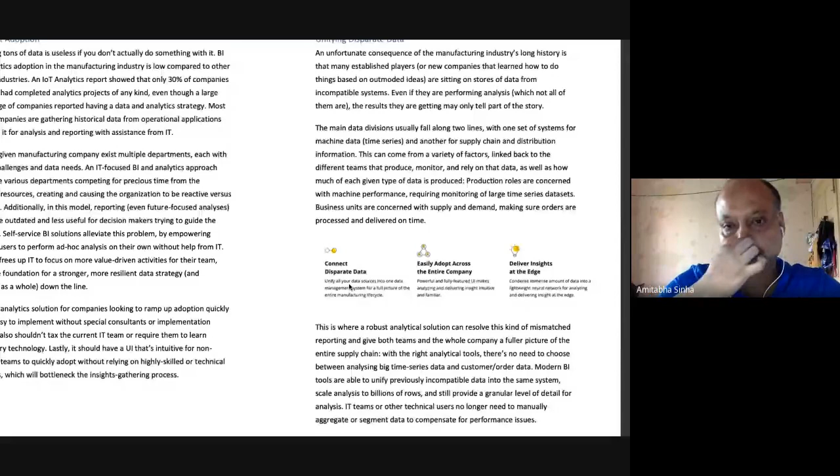They're typically called distributed control systems, DCS in short form. And then there are process technologies, like I was explaining, Lummus, where there are gas crackers and hydrocrackers. They are governed by something known as historians. There is a process historian, there is a data historian. All these historians also generate a hell of a lot of data. Now, as of yesteryears, let me stand corrected.

So this data were all generated, and they used to be consumed by the, quote unquote, instrumentation team, which is typically the control engineers, using control systems. And they used to use that data to operate the plant, but that is where the data was restricted. Beyond that, the data had no visibility.

For example, the head of the plant would not get an overarching view of the plant. If I take an example of Haldia Petrochemicals itself, Haldia Petrochemicals has 9 individual sub plants, and that corresponds to one full plant of operations of HPL. But the head of the plant would not have one single visibility of the entire plant. He or she would have individual visibility with respect to the cracker unit, the storage units, the downstream, but they're all disparate. There was no one uniformity.

Now, what was the problem? The problem was that these individual sub plants are very dependent on each other. Let's say from the storage, the raw material should flow into your cracker unit. From the cracker unit, there are downstream products which get created. Those downstream products would again go into your downstream units. So each one of them is dependent on the other.

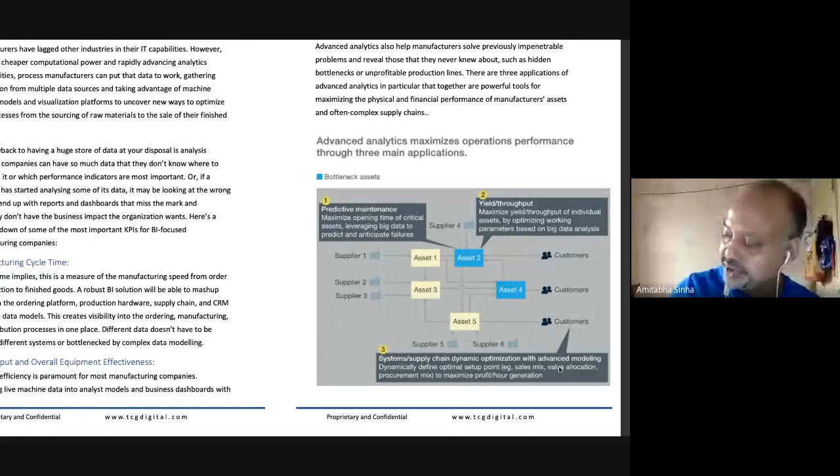Based on the 3 months demand, can we plan the production? This is the demand for the next 3 months across various geographies of India. So, let's say this is October, I'm planning for November, December and January. So in order for the supply to reach, let's say 15th of November at Mumbai, on the West Coast...

The truck needs to leave the plant, say, 7 days prior - for argument's sake, leave on 7th of November. So in order for the truck or number of trucks to leave on 7th of November, I need to have that quality - we call it monomers and polymers, I'll explain that shortly - that needs to be produced by the 6th, that particular volume, so the loading can happen and the trucks can be dispatched on the 7th. So if the production needs to be finalized by the 6th, the production needs to start from the 4th.

Which means the cracking should start on the 4th and the downstream product should be ready by the 6th - it takes about 2 days. So if it starts from the 4th of November, I need the naphtha to be in place by the 3rd of November.

Now, many times the naphtha is not locally procured from India. So in order to meet that demand, if I need that particular quality - 84% Piona quality of naphtha - by the 3rd of November, where will it come from? It will come from, say, Japan. If it comes from Japan, it needs to start coming in - it should be ordered by, say, 15th of October, and then dispatched on the 17th. Give me a second.

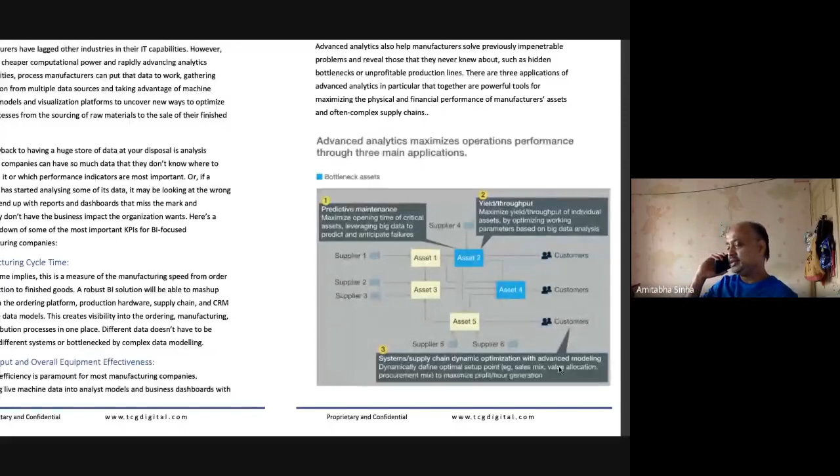Okay, so you understand the complexity of the planning, right? This is typically with one byproduct, with one region, let's say west. Similarly, south will have the need for a different grade. Now for a different grade, how will that manufacturing work? So where do we, how should we plan that production?

How should we plan that procurement? Where should we give the order? So it's fairly complex. But you realize that if you're able to solve these three problems, we are looking at a fairly advanced analytics, machine learning driven plant with a lot of benefits, right?

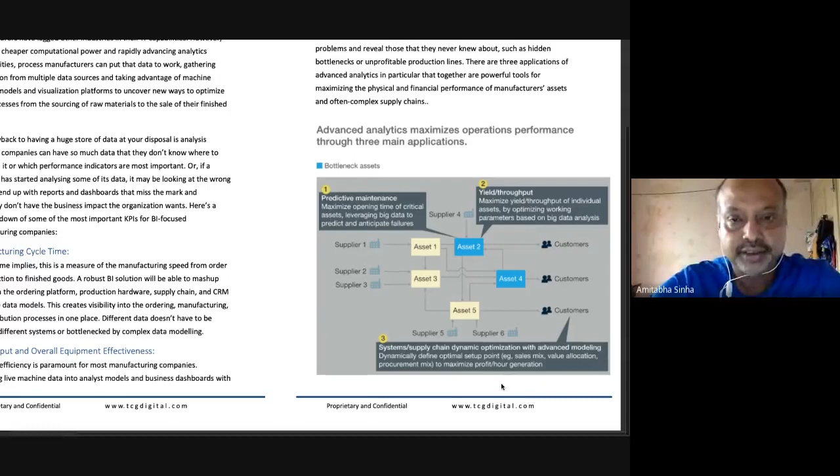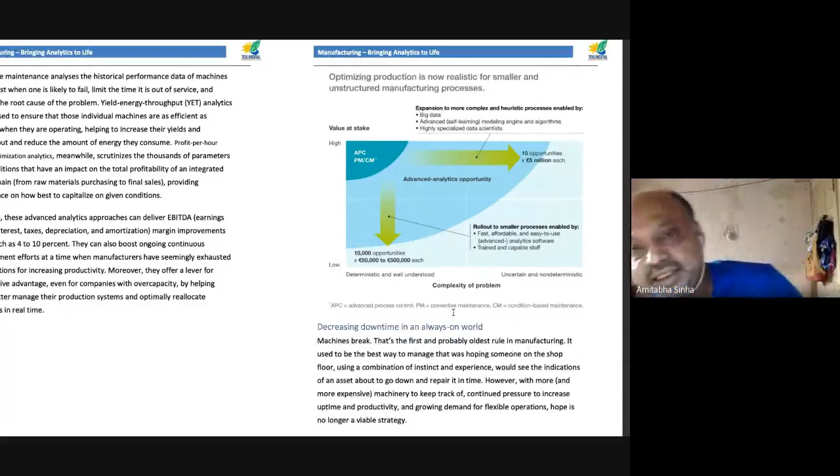So what we have seen is there is something called value at stake. What do we mean by value at stake? Value at stake is, as the complexity of the problem goes up, the value at stake also goes up, right? Which means if you're able to solve the predictive maintenance, yield optimization, as well as your supply chain, obviously your value at stake will be higher, and actually the complexity of the problem will also be high.

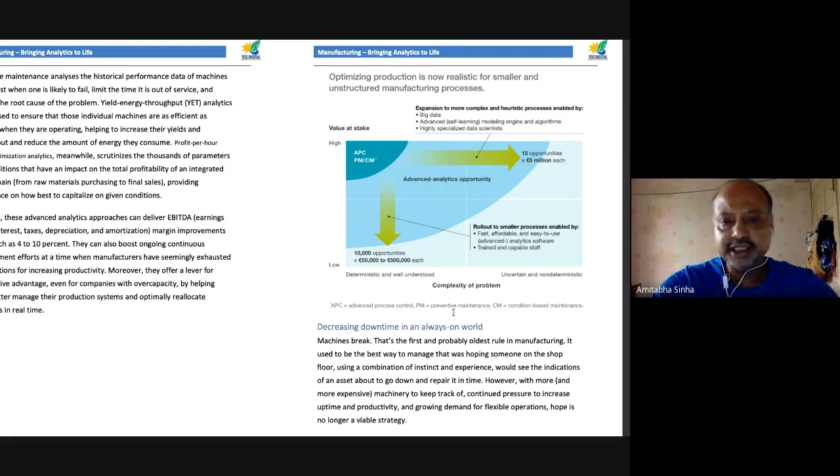The question is, shall we take all the opportunities together? May not be possible, right? So it has to be taken, for example, one step at a time. So typically, what are the different baby steps?

So inventory optimization, where you optimize the inventory. Now please keep this in mind - in case of a manufacturing unit, unlike a retail, if you're talking about a kirana shop, or you're talking about a hypermarket or a superstore, something like you'd be familiar with Spencer's, Reliance Fresh, more retails of the world - there, the inventory is one side. One side in the sense, what is your stock? Your stock of the individual SKUs, stock keeping units, either at your godown or at your shop. But in case of manufacturing, the inventory is of two types.

The incoming inventory, or we call it inward inventory, which is typically the raw materials. And then there is the outgoing or outward inventory, which is the end products. So both of them need to be optimized, because any plant would have storages which are fairly fixed in nature. So the incoming naphtha can only have so many gallons, like million gallons or million tons, that kind of a concept. Let's say X million ton of naphtha can only be in the inward inventory. Similarly, the outward inventory can only have, let's say, A amount of grade 1, B amount of grade 2 capacity, and you can't mix them.

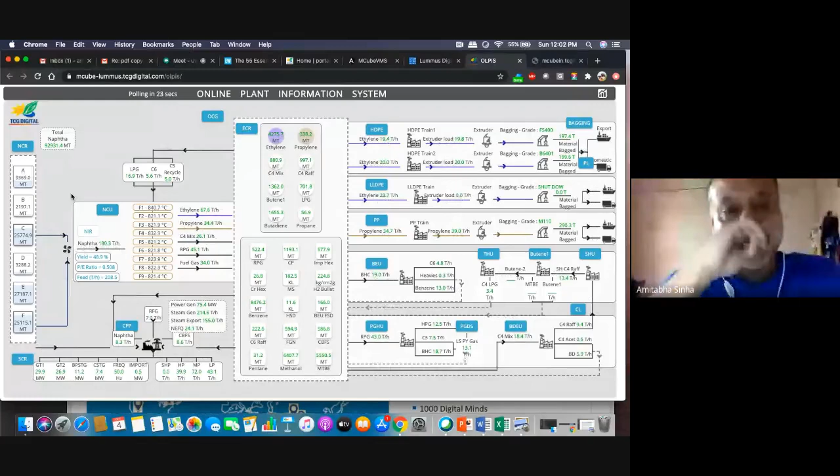For example, let me explain this. This is the cracker unit. The cracker unit takes in naphtha. So in order to produce an end product, the cracker unit expects, let's say, about 83% paraffin content. Now, so what we are suggesting is that between tank C and tank F, if you blend using, let's say, a 40-60 ratio, where tank C has a higher quality and tank F has a lower quality, you will get the desired result. So which means it is an optimal blending that goes in.

So this is your NCR control room, which controls the tank, and then it goes to the heart of the plant, which is NCU, naphtha cracker unit. Now this is, you see the naphtha is going in at 180.3 tons per hour, and these are F1 to F9, your furnaces, each with a different temperature. So this is the naphtha feed going in, and what you see is called the product slate output. So this is ethylene, propylene, C4 mix, RPG, and fuel gas. This is the output from the naphtha cracker unit, and they get stored into different intermediate storages, right?

So this is your, see for example in this case, ethylene, propylene, C4 mix, right? You have RPG here, so on and so forth. So these are your intermediate storages, okay. Now each of them is controlled by a plant. The blue ones are your smaller plants. I was talking about HPL having about 9 plants, sub plants. So these are your sub plants, right? NCR, SCR, NCU, OCG, CPP, etc. So ECR is the East Control Room, which takes care of the intermediate storages.

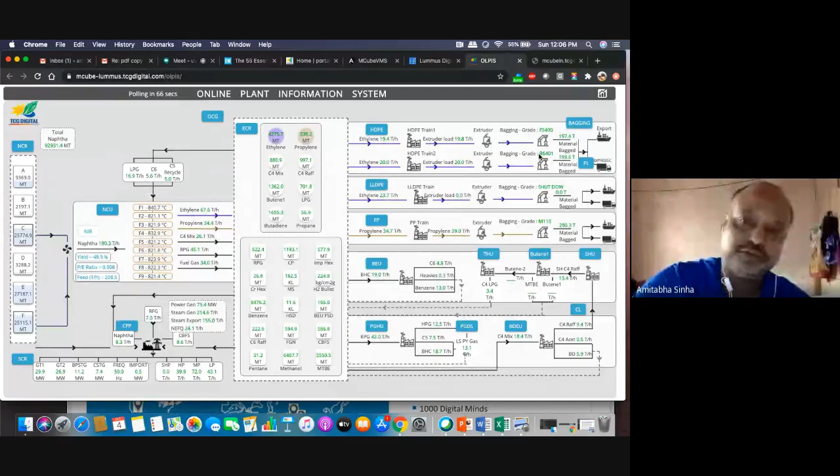Reddy's laboratory, and so this is getting produced. Similarly, 6401, this is your food grade plastic, which is typically used for food products. So this is, I'm not sure if you are familiar.

This order is going to Oriental Cuisine. Oriental Cuisine is the company who has your chain restaurants like Mainland China or Calcutta's of the world. Okay, so this is getting produced for them. So that's an HDPE. Similarly, LLDPE. So this is high density polyethylene. This is called linear low density polyethylene.

So see, for example, this plant is under shutdown. That is why you see that the extruder is not working. So this is actually in shutdown, not working now, going under maintenance. This is PP, which is polypropylene. This is producing a particular grade called M110, and it is getting produced.

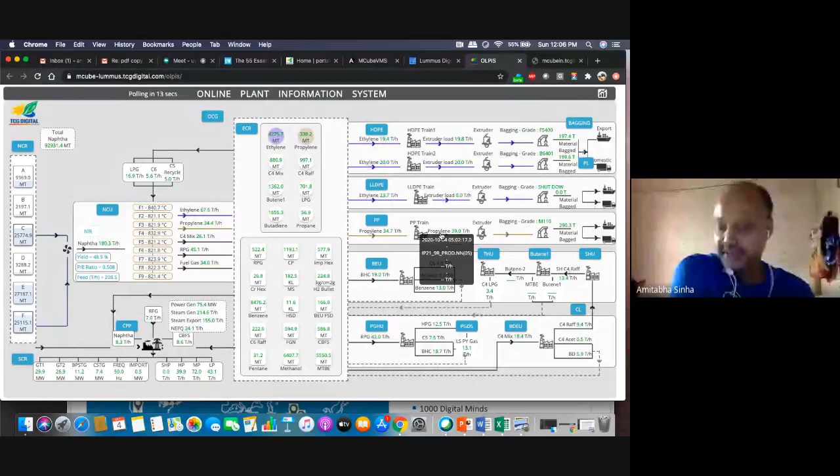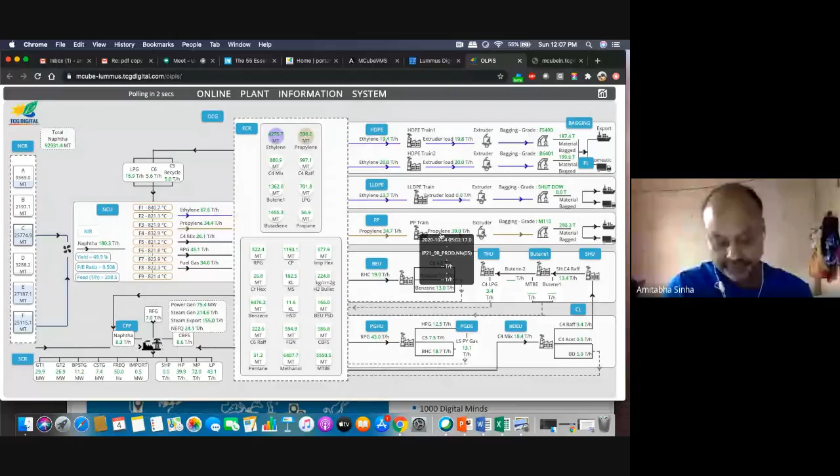So this polypropylene is typically sent to companies like Nilkamal Plastics, who actually manufacture furnitures and all that stuff. Okay, so that's your polypropylene. So the point is, what you see here is the entire battery limit of the plant. At any point in time, you know what is happening in the plant real time.

Now this particular 2D digital twin is available on a big screen near the WTD's and the CFO's respective rooms at the Haldia head office, and they know what is happening real time. Now, this is called level 0, or the first level view. If you go to the second level view, you get to see different KPIs. This is the operations KPI, this is the production KPI, this is the quality KPI.

If you look at, for example, operations KPI, this is your naphtha flow, coil output pressure, coil output temperature. So you get to see the different COT temperatures currently there. And you want to see a trend. I think the data is getting refreshed, so this is in between that. But you will be able to see the trends. The trends are all there. You can see that in production as well.

So at any point in time, you get to see what are the main KPIs, what is the naphtha, what is the LPG flow, so on and so forth. All these data points are available. The entire plant data is not restricted only to plant operations, but also available from the head office. And this is true for all. For example, if you go to NCR, you will be able to see the trend as well. The data is getting refreshed, which is fine.

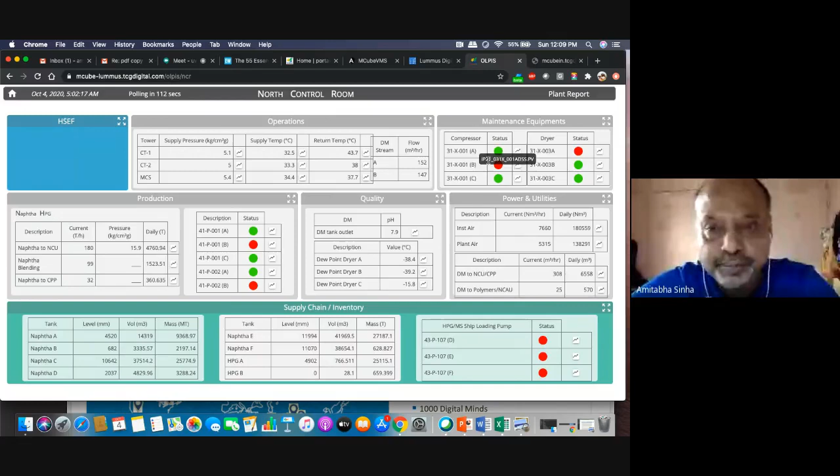You can see the trend of all the compressors, the compressor maintenance equipment, the production parameters: which pump is currently active, which pump is not, the daily totalizer value, the trends, etc. So all this trending is possible. Unfortunately, the data is getting refreshed because on Sunday we do some maintenance. But at any point in time, you get all the KPIs and real-time values. Now this is a huge benefit.

Having the visibility itself. So that was the first thing: working with the disparate data, getting all the data at one place, so that at any point in time you can actually go and work. Again, this is like a typical KPI report. This is NCR's plant report, so you get to see what density is there, the quality itself. And this is your captive power plant, water cut, highlights, so everything is there.

So this is the ingest layer. The ingest layer is capable of taking in data from transaction systems, different IT/OT tags, social media, flat files, etc. So what you saw in that system that I showed is the data is getting refreshed every 120 seconds. So if I go here, for example, you will see the polling in 109 seconds. So this will get refreshed. So this is real-time data that is coming in from the plant. So this is the capability of IT/OT streaming data.

So that's the ingestion layer. Once we get the data, in order to work on machine learning and advanced analytics, it is absolutely important that you, for example, detect the noise and remove it, understand the outliers and remove it, and also transform the data, because from your DCS we are pulling in about 15,000 tags every 2 minutes. And there are tags coming in from, you saw, 9 plants, in all pumps, compressors, furnaces, and so forth.

So sometimes, because of error in the flow meter or the different meters, the data reading can be wrong, correct? So that's possible. It can happen that, for example, some sensor has actually gone offline, so it will not give any data as well. So it's very important that you actually process the data and transform the data.

Now once we process and transform the data, we store the data; we have different data stores to store it. This is typically what we call a lakehouse. Why do we call it a lakehouse? See, this is neither a data lake nor a data warehouse. If you're talking banking parlance, it would be a data warehouse, right? And in some cases, it would be a data lake, a lot of data. But we call it a lakehouse because it's the best of data lake as well as data warehouse.

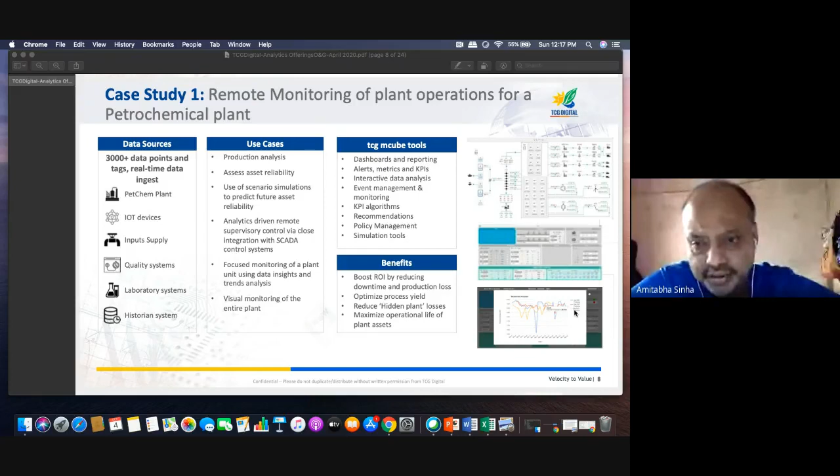What are the use cases? The use cases are many. This is the tool, the diagram that I was showing. Unfortunately, I could not show you the trend. This is how the trending looks at the bottom. These are the benefits. These are the various data sources. This is very important: the ability to take in data from data historians, distributed control systems, and so on. And this is the remote view which I was showing you.

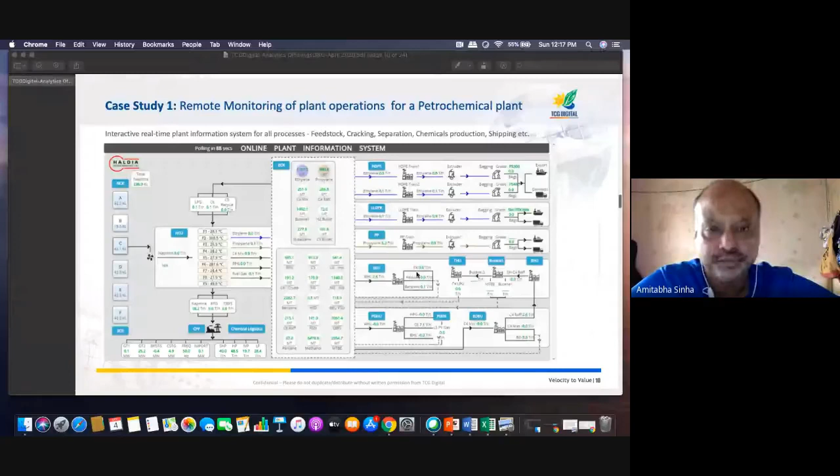Now next, this is the first step. While this is remote monitoring, it also solves the problem of getting in the data. Once you have the data, let's get into a yield or an optimization problem. Let's look at the yield and the optimization problem.

Sorry. Okay. While this opens, I'll show you both. Let me just explain the context and then it will be easy to take a look at it. This is the MCube platform, this is the advanced analytics module, and this is the dashboard. Give me a second. It's loading. Okay. I have to just remove the last 2 years. Let me just reload it once. Let me explain the use case here and then we will come back to it.

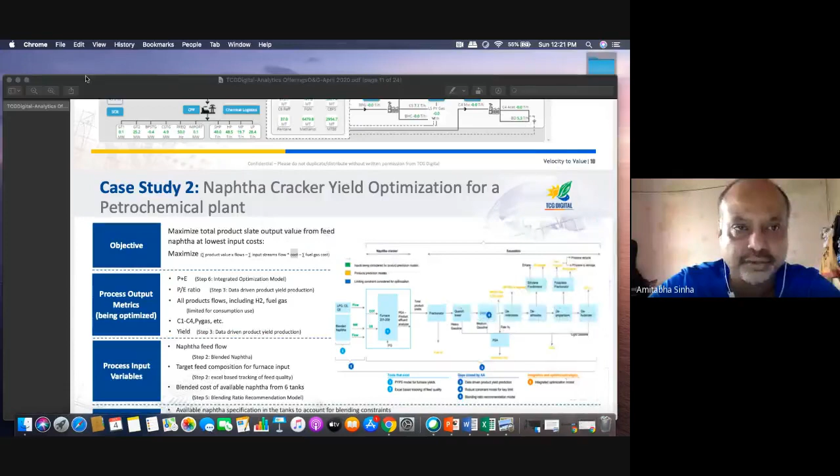Now similarly, the product flow, we know the product flow, right? So how do we know the product flow? We know the product flow from here. So this is 67.6 tons per hour ethylene, propylene, C4, and fuel gas, right? So all of them are the product flows. And each one of them, say fuel gas, RPG, they all have an estimated cost, or revenue that we can earn from them. So that's typically

the objective function. Now the process output metrics, what are we optimizing? We are optimizing P plus E. So it's propylene plus ethylene, P by E ratio, all product flows C1 to C4, etc. So these are the outputs that need to be optimized. So in this case, going back, P by E ratio, we need to optimize this. So this is one of the important parameters, P plus E, etc.

Now if you go to NCU, see, this is the KPI, this is what I was showing you. Now if I look at it, this is the production parameters. So this is naphtha, purge. So this is P plus E yield, right? So ethylene flow, PP flow, etc., polypropylene. So all these individual product flows are all taken care of. It is all available here itself.

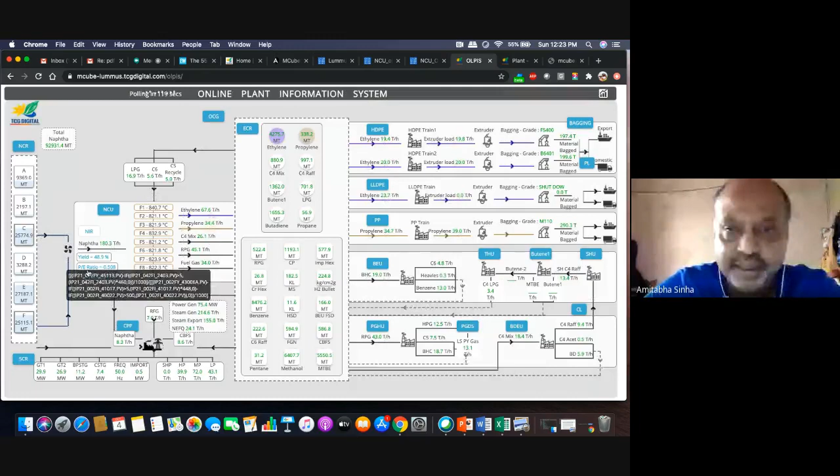So P plus E and P by E, these are the two parameters which were involved there, correct? Now in this case, P by E is available on the top view itself, P plus E is available inside. So these are the two KPIs that need to be optimized. Now let's look at this. That's your output process. And what are the input variables?

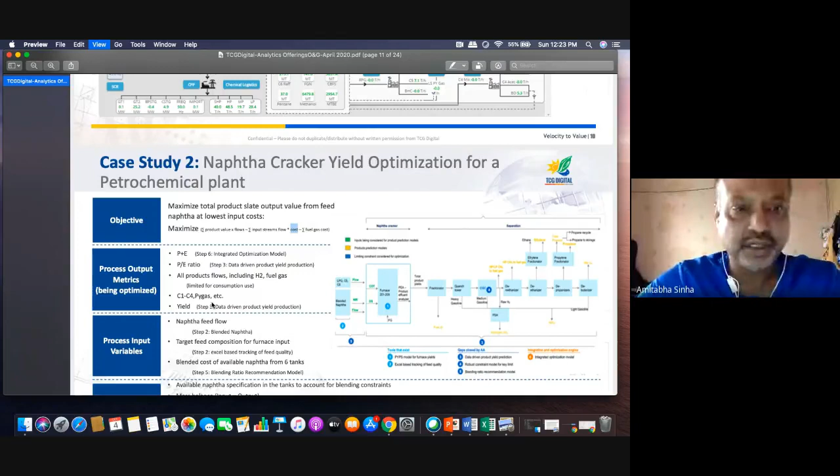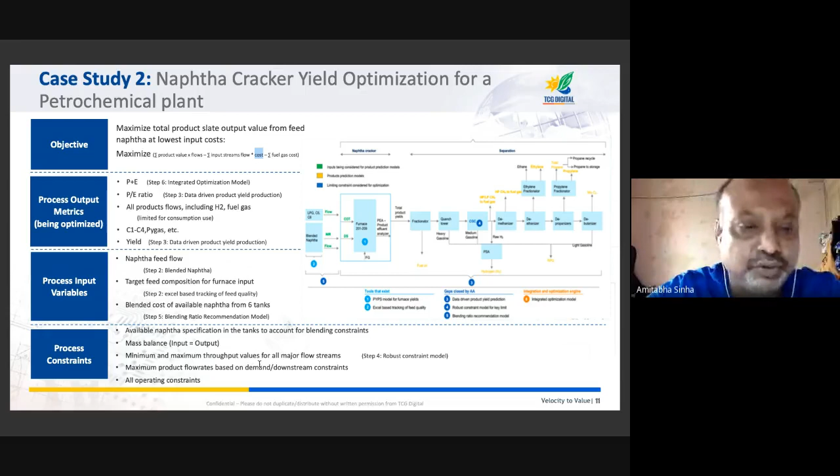The input variables are of course your naphtha feed. We saw that naphtha feed, the cost of the naphtha, the target feed composition of the furnace input, blended cost of the available naphtha. Now this is the blending that was happening. And then there are process constraints. What are the process constraints? The maximum, minimum throughput value, maximum product flow rates, all operating constraints, etc. Now this is the most important part.

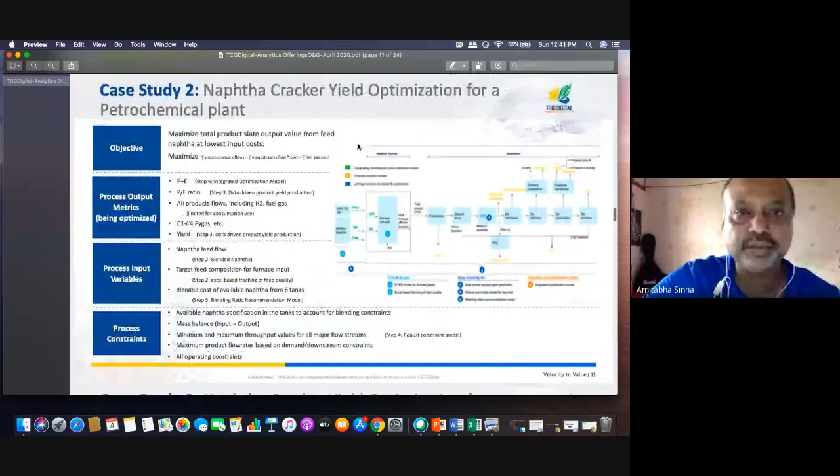Okay. So this was typically the optimization. Now, once a dashboard comes up, I will be able to show you the actual monetary value. For example, we were able to increase the profitability by about 0.4. So even the 0.4 would translate to not less than anything between like $1.5 million for the plant, even with the 0.4% optimization.

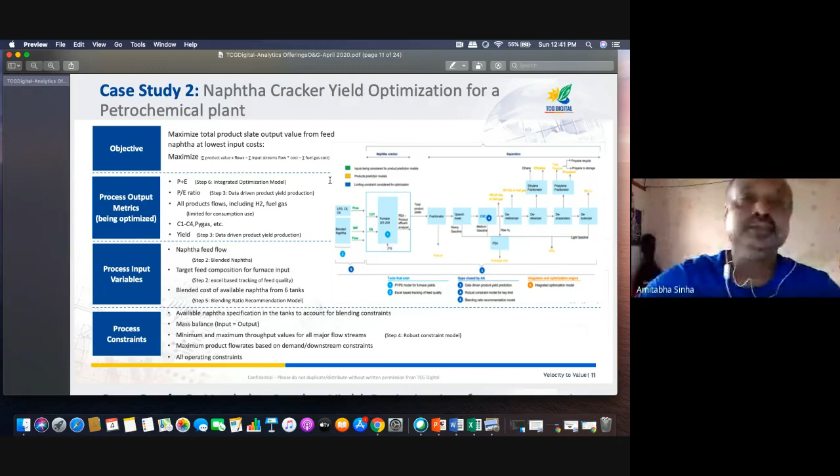So we have been able to achieve anything between 0.25 to 0.40 optimization in case of Haldia naphtha cracker, and that translates to about 1.2 to 1.5 million dollars per quarter. That's a lot of money. Okay, so that's the important piece which I was talking about. And then so this is fine.

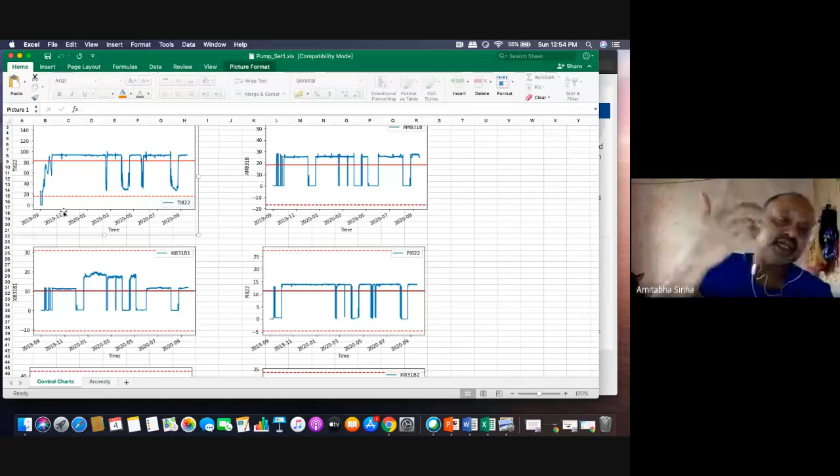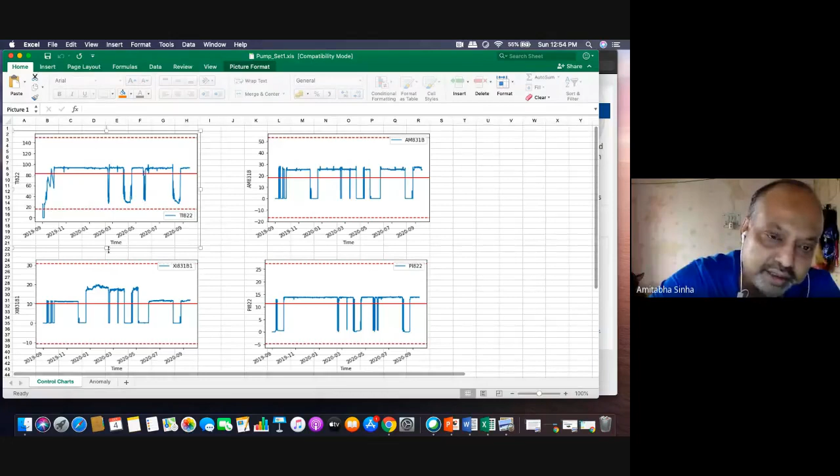Then we realized—how do you understand an anomaly? Anything that goes beyond USL or beyond LSL, beyond the process capability, is an anomaly. So in this case, this has gone down—that's an anomaly. Anything within the 2 red lines is fine. Now, these are the 2 tags which are anomalous.

So very simply, we plotted them together on a graph, and we realized there's a strong correlation between these 2 tags—both drastically went down, both drastically came back up. It was a steep decline and then a steep increase. So this is one anomaly that we detected.

So again, we did it for the pump, and this was for the other compressor set. Now if you look at compressor set 1 again, see, this is an outlier, below LSL, this is an outlier, above USL. This is below LSL, this is above USL, this is below LSL, right? So this is the same logic, mean plus minus 3 sigma.

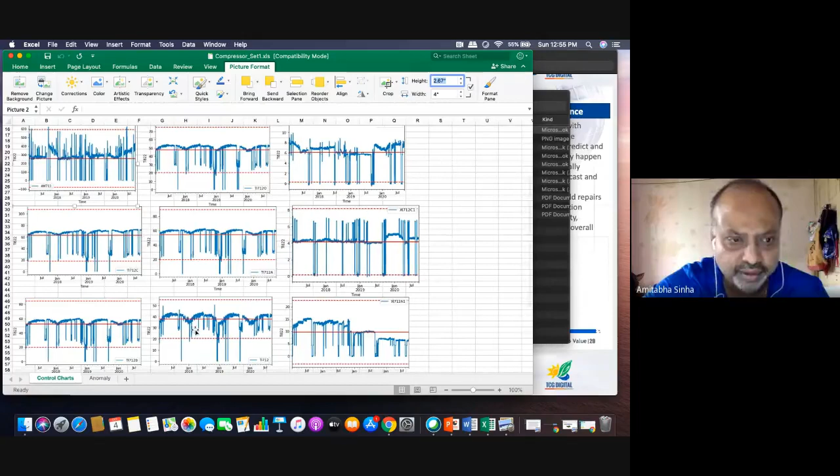See, there are a lot of anomalies here, some of them have a lot of anomalies. This has anomalies too. So then we created a plot, and we saw that the days of anomaly occurrence are correlated. This is one set of tags, this is another set of tags, but they are creating the anomaly on the same day, isn't it? Okay, so that's for compressor set 1.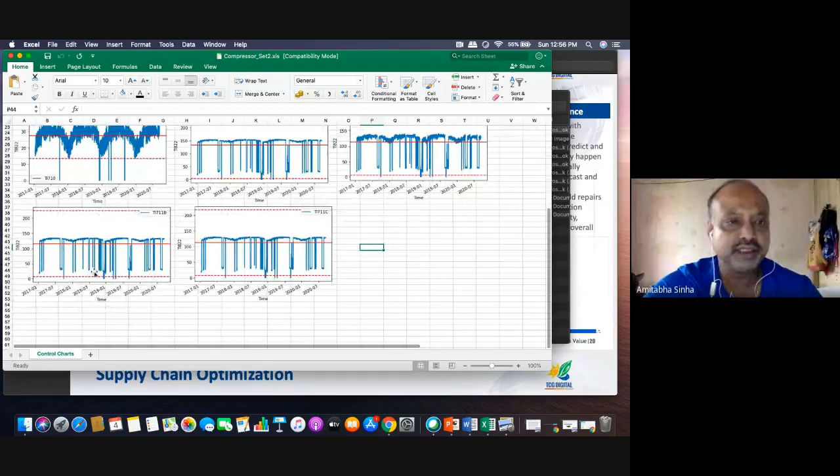Let's look at compressor set 2. Now in compressor set 2, here of course you see anomaly, no anomaly, you see anomalies here, anomalies here, right? So again, this anomaly is also here. So then what you do is, you do a comparison of the tags and correlate them.

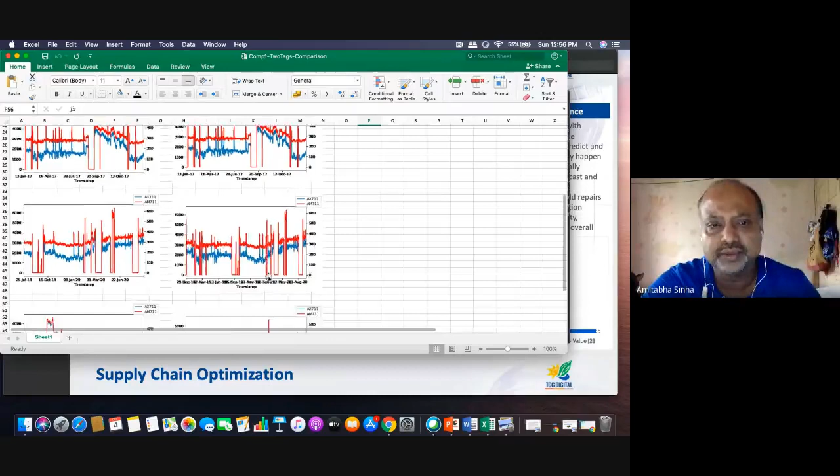If you correlate them you will see that the anomalous behavior of the tags have a lot of similarity. So they are associated, meaning they combine together to create anomalies, right? Okay, so this is a clear cut anomaly. So again, this is a straight dip, right? This is a straight up.

See, this is a normal heartbeat fluctuation. Here there is an enormous fluctuation, right? Similarly, if you see here, there are drop-down deads, right? It should not have occurred. It should have been a very steady fluctuation. Drop down, right? Drop down, immense drop downs.

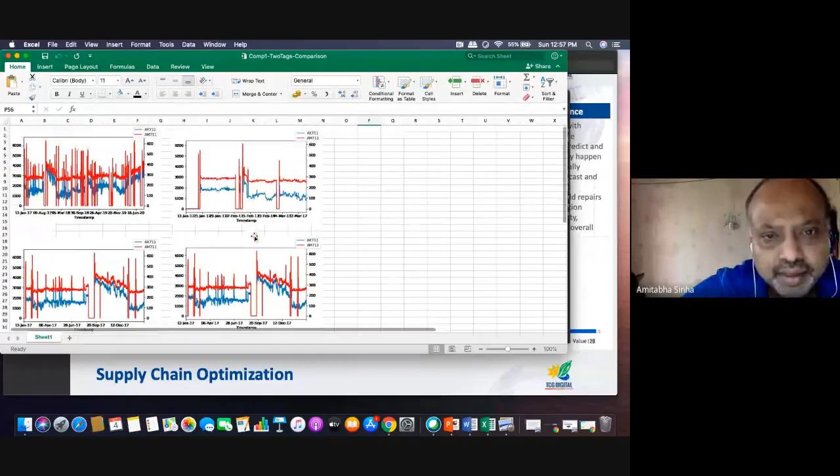Okay, so you have started working on this. You will find correlations like this as well. So we are trying to find out the pattern also, correlation. And then of course what we will do is use machine learning techniques to detect basically anomalies. So we create outliers like this.

So this is an outlier, very straightforward. So we have seen the control charts, we have seen the outliers, right? And then what we do is very interesting. So there are two ways to do it. We do a multivariate statistical analysis, where we do a dimension reduction.

Of course, because there are 8 tags, and all of them will not correlate. So your principal component analysis will help in reducing the dimension. So there are 8 tags, we will only find correlation between 3 or 4 of them, and then we do a multivariate anomaly detection.

So this is the multivariate one, and in this case we use Mahalanobis distance to calculate. So what is the logic? When you plot the cluster, you find out that the closer the point in question is to the center of mass, the more likely it is to belong to that particular set.

So Mahalanobis, this is named after Dr. Prasanta Chandra Mahalanobis, the founder of the Indian Statistical Institute, right? That's his proprietary algorithm, the Mahalanobis distance, MD. It is the distance of the test point from the center of mass divided by the width of the ellipsoid. So this is how we calculate.

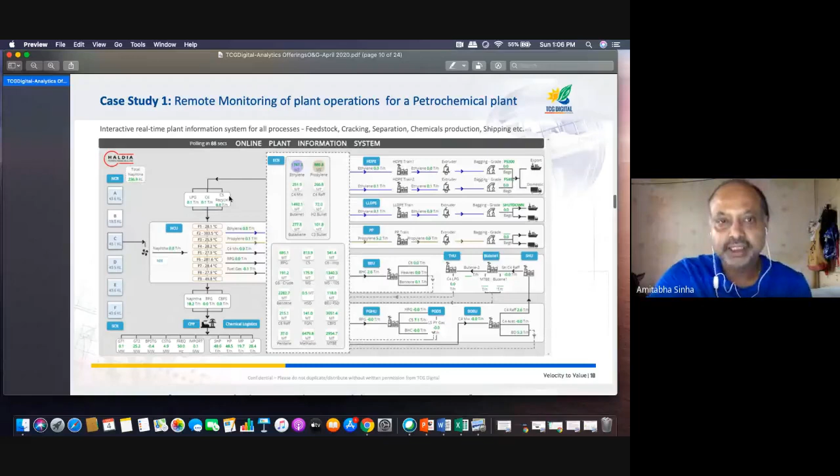So this was our first project. Once we did remote monitoring, we knew that all the data is available. Then we created this depiction of the plant itself, and with that we started the cracker optimization, which is yield optimization. We created different KPI reports. Then the yield needed the naphtha to be blended, so we did blend optimization. Because of this, we got a similar case study in steel, so we used that for steel.

And now the next logical step is what I just showed you - anomaly detection and plant maintenance forecasting. It's work in progress. Demand forecasting is already done, spares optimization is already done, and spend analytics is something we are working on. So that's what I had to share from my experience for today.

I hope the session was useful. I'm okay to take questions if there are any, and I'm happy to discuss. Any queries from any of the participants?

So ma'am, this only explains two things. Either the session was too bad, I was absolutely not up to the mark, nothing worked, I could not pass on or add value to the session, I wasted everybody's time, and that's why they have no comment. No, it is not that way.

Since there is a gap, it's not like that, sir. It's completely into production - we don't have much idea about production, and we don't know what kind of questions to ask. We agree that there is a gap between academics and industry, particularly in India it is a wide gap, so we are not much exposed to industry like the production area - that is the reason why.